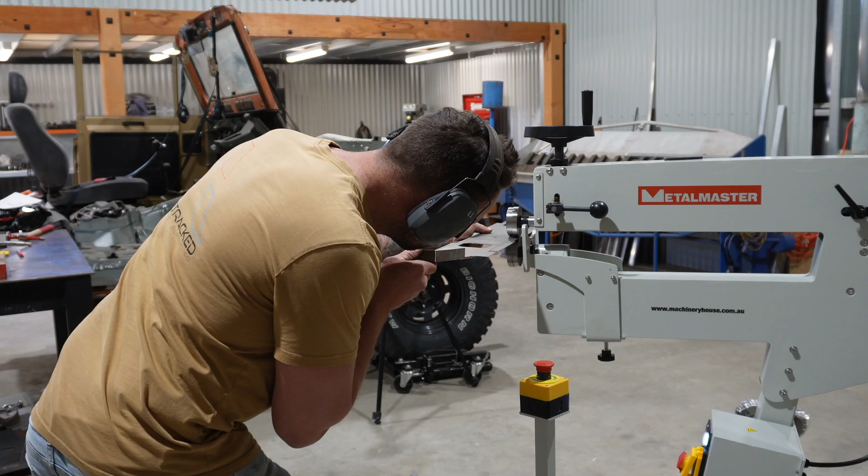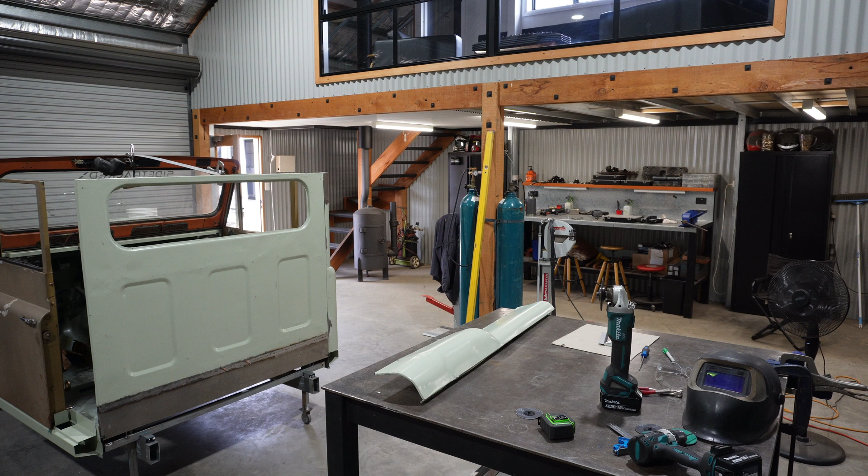Right, back wall's on. Still need to do the contours down the bottom, but I'm gonna try and get a, well, I'm not gonna try, I'm gonna get a quarter on that side. Now, I'll just shuffle this out of the way. You might be able to see there. This needs to be extended down to bottom of sill. Well, that's what I'm chasing anyway.

And then I know that my sill is going to be short by about 20 or 30 mil, which is annoying, but whatever. It's metal, you can join it. I couldn't foresee that when I was doing the sills. If I was an intelligent man, I would have made them 400 longer and then you'd have no trouble, but whatever. It was 1200 sheet, made sense.

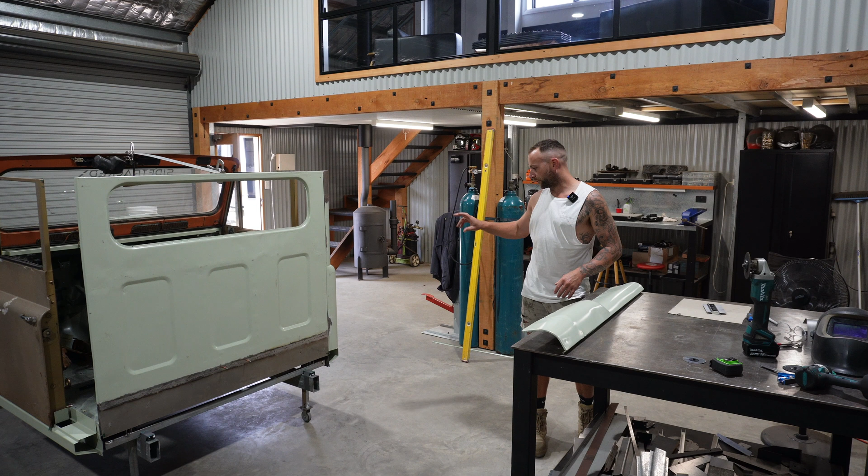Actually, having said that, I do have the first variant of the, I made up one sill, so I should be able to section that out and just add a bit on. I think that's the same profile. Anyway, so I'm going to replace the majority of this. That's my aim anyway. And obviously whatever needs to be longer,

I need minimum 100 mil, so I need to add 100 or so there. Well, let's just say 150 for a bit of wastage, and an extra 150. So I might make a piece at like 300. That way, I should have enough for both sides when I dock it off.

So, first of all, I'm gonna just use my profile gauge to get the profile. Now, both of these have been buckled. Well, this one's not too bad now. I've had a bit of a tinker with it, but this one's all bent out of shape. So I'm gonna get my profile from the most rigid part of this whole panel, which is in here.

So obviously I'm gonna come up into where the radius finishes, but I don't want to move too far down because the further it goes down, the further it flares out and becomes buckled. So somewhere about there is where I reckon I want it. So that's a basic radius there. I'm going to transfer that to some cardboard. Where was that? So that point.

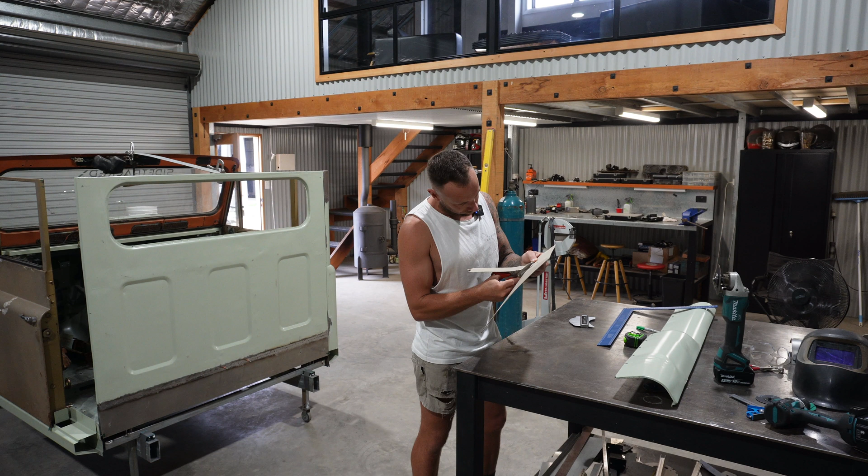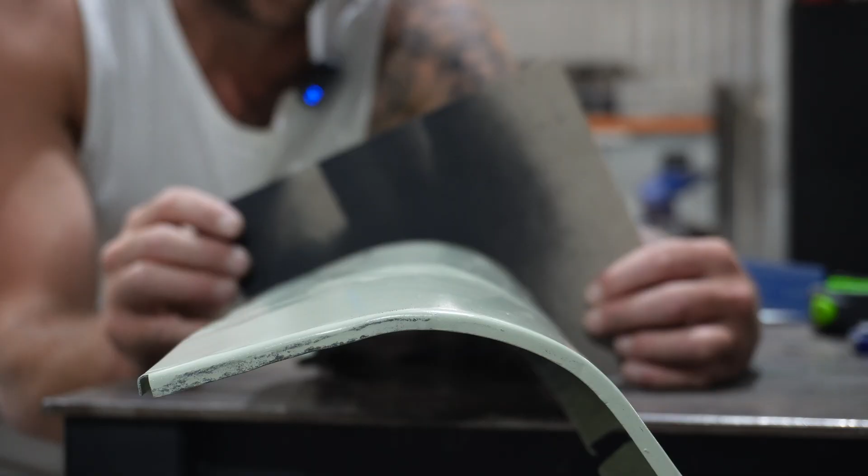Now I really would like a sheet metal roller for this job, but not super sure I actually need it for a lot, so it's not bad. There is not too bad of a template. So if we put that there, it's horrible. So that's what I mean by it fanning out. We want that consistent for obvious reasons. I'm a bit intrigued to see what... it's actually pretty good from side to side, so that's good news.

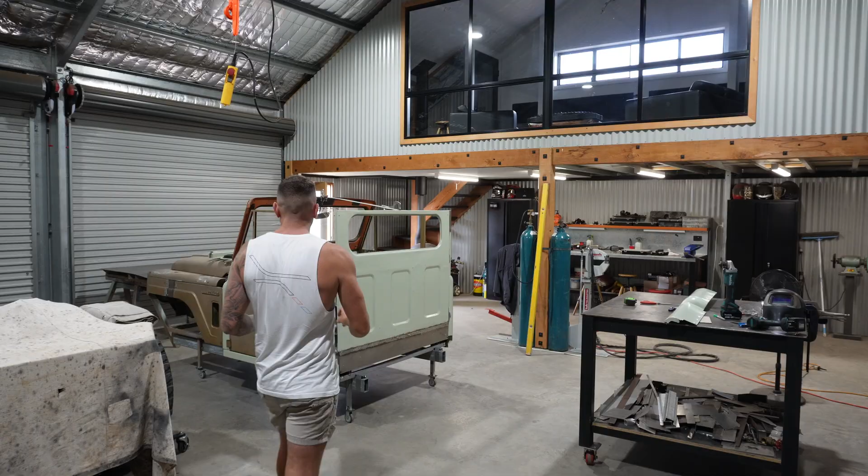So that's our radius. I've just marked on it back wall and door, just so I know which end is which. It is kind of obvious anyway, but never be too careful. Well, I just pulled myself up there. I was almost about to cut that piece off and remembered that we are more than likely going to be stretching these quarters by 50 mil. So I need to take that into consideration with this.

Now, obvious or not, I'm going to make that 50 mil extension down the flattest, straightest part of the panel, down there. So I'm going to incorporate that extra length into this bottom section straight away. I think that's the best way of doing it. I'm not sure if that will cause more distortion than running a 50 mil strip right the way along after the fact, but it makes sense to me to do it like this.

So yeah, I just need to make sure instead of, I said 300, I'll put 350 or 360 or something like that in there. That way we've got some more length. We can always use some more length.

All right guys, I'm a little bit lost on where I was, but I think this is a couple days later from the last clip.

But I think we were working on this other quarter panel. Now, I think I was marking up to replace the radius section. Bear with me for 1 second.

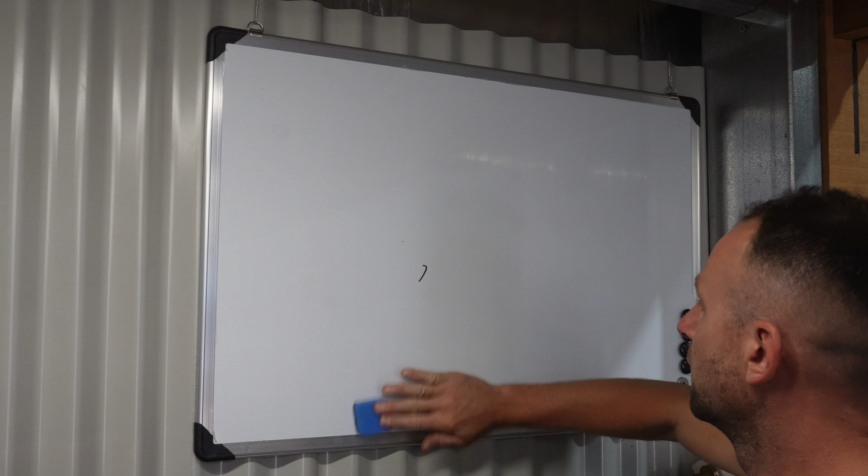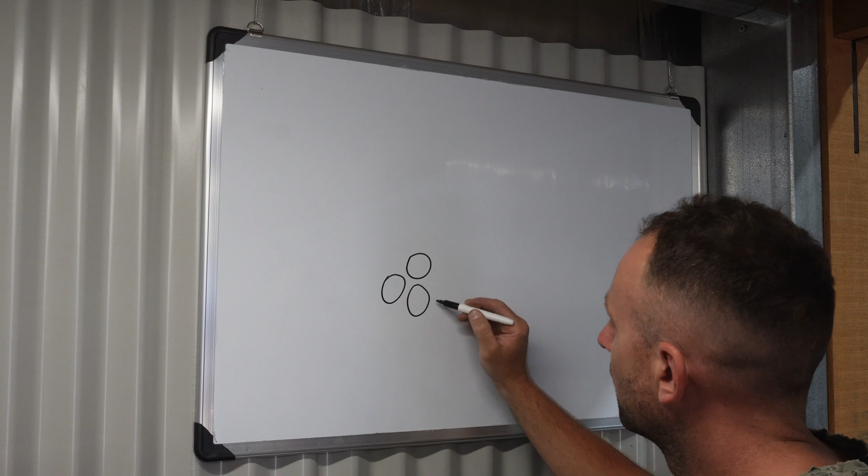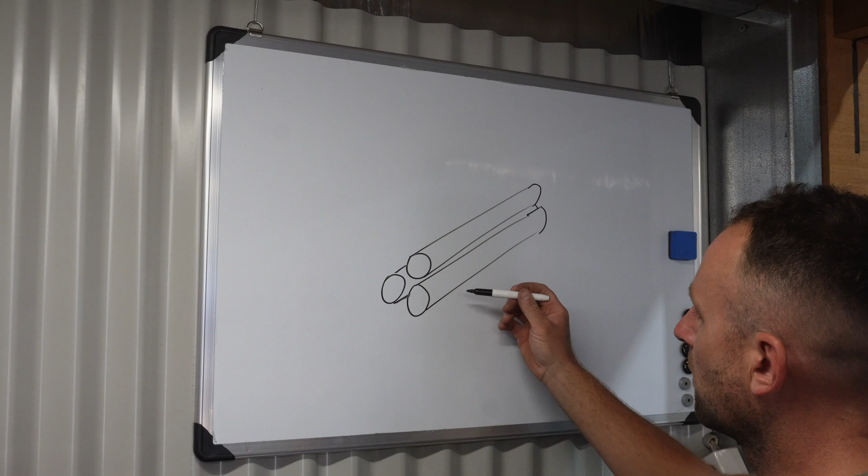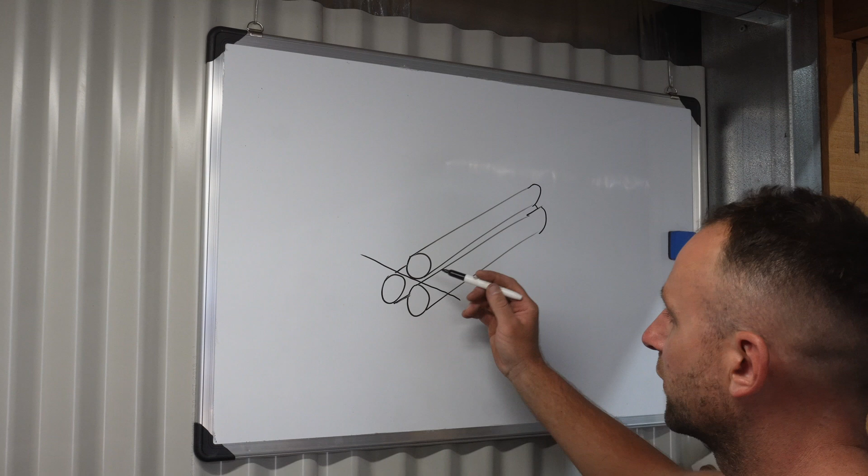A slip roller consists of 3 rollers, somewhat like that. There's one in there somewhere. So your sheet will go between here and here. So you'll put it in basically there. And then, well, there's a few different ways. Basically, one of the rollers has got like a screw on it and goes down. Some on the top; the one that I used, this one went in like that, and the other 2 were stationary. But effectively, it's the same concept.

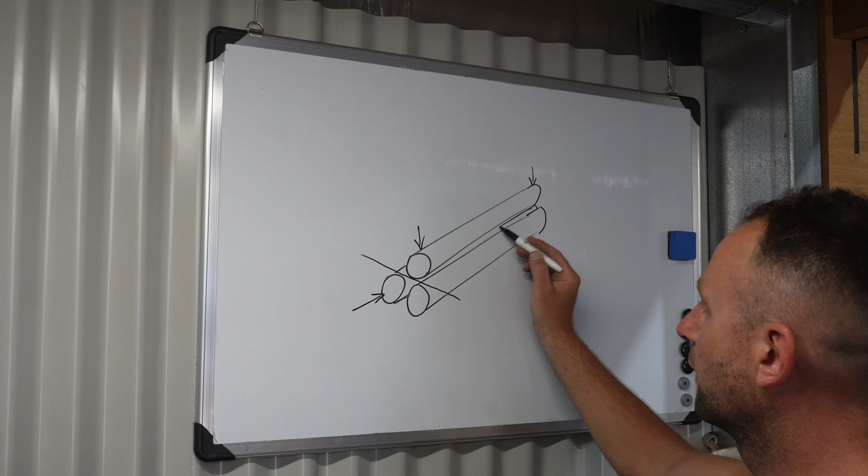The problem with this one that I was using is it's a relatively cheap one. You can spend thousands of dollars on a slip roller. This is a 3-in-1 machine. Still very, very handy to have in the shed. But what we think was happening was, with the tension, this roller didn't have enough strength in it, and it was getting a slight bow upwards, which in turn gives you a different radius in the middle because there's not the same amount of tension here as there is on the ends. And I'll show you what I mean by that.

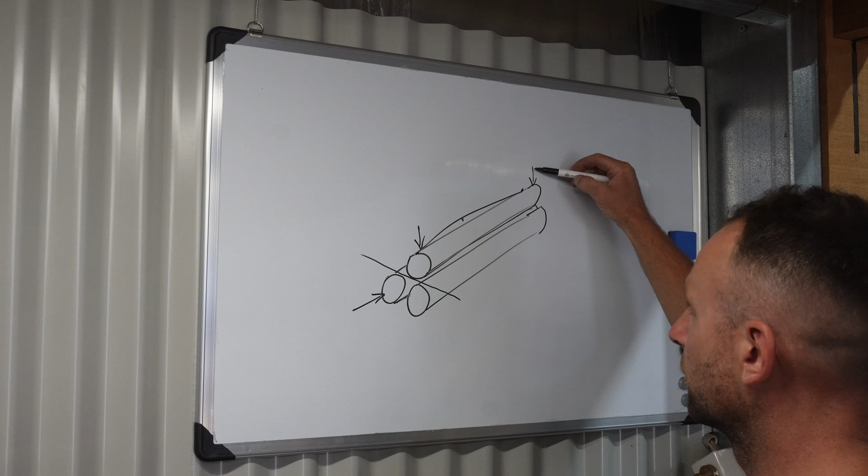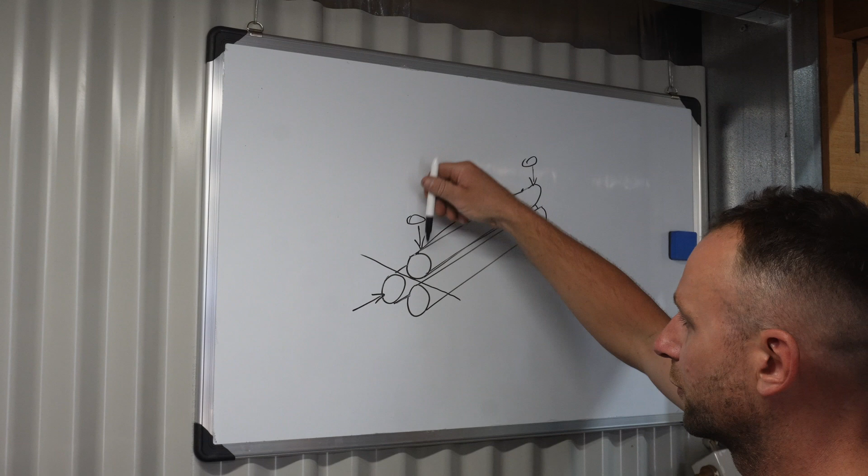But yeah, effectively put your sheet in, and then if you want to get a tighter and tighter radius, you would adjust your handles and screw this down to get a consistent curve. You want to do these literally the same amount. So if you go 1 turn, you go this one 1 turn as well. If you wanted to make a cone, I'm pretty sure you would just operate 1. So it would tighten this radius, but this one would stay wider, which would then form a cone. But I'll show you what I mean by an inconsistent piece of sheet.

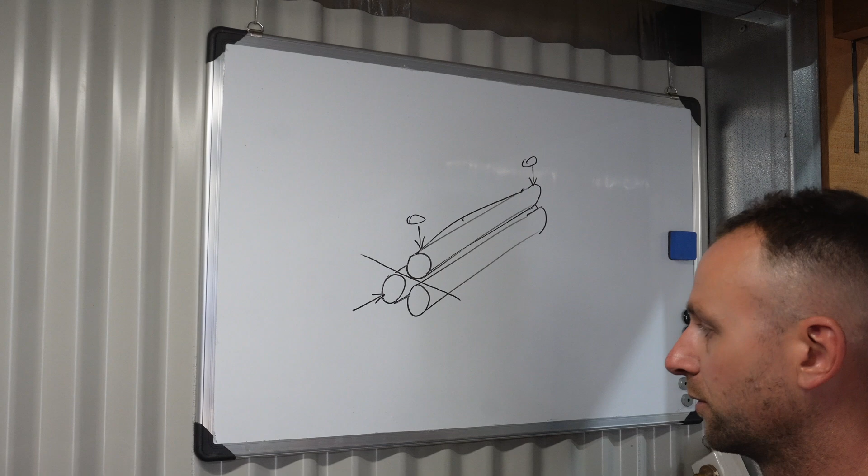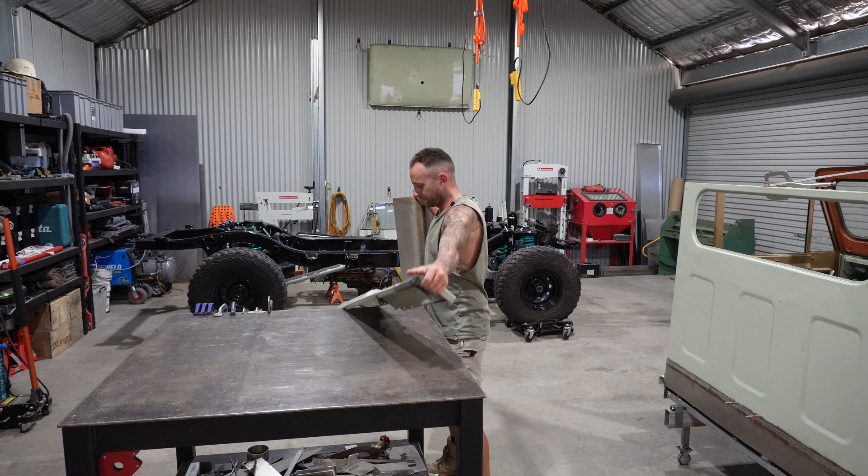So we'll grab both of these. So I made enough to replace that side as well. I don't know if you can see that. If I run it down the lens, you may see that the middle isn't super consistent. Both ends are pretty good as far as to each other, but you can see there's a few deviations. I don't think that'll be an issue because now that it's sort of formed, I think I can manipulate it enough to get it perfect. So I'll grab my template here.

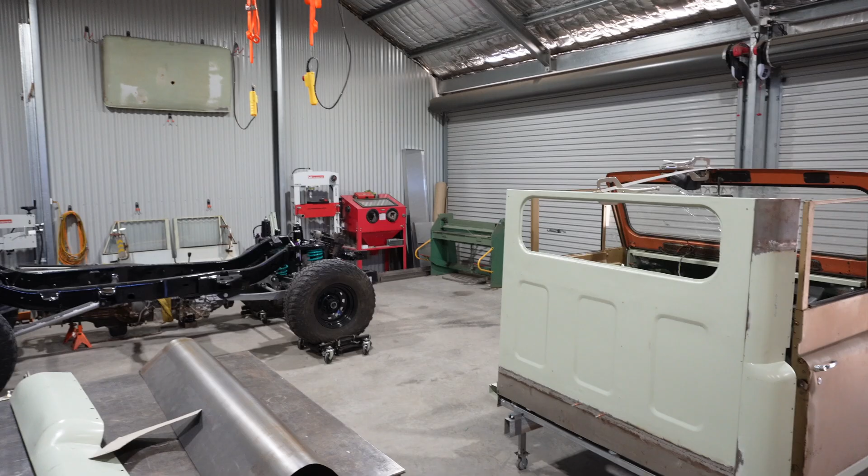Oh, the old shin bone on the shrinker stretcher trick. That's always a good one. Oh, it tickled actually. Anywho.

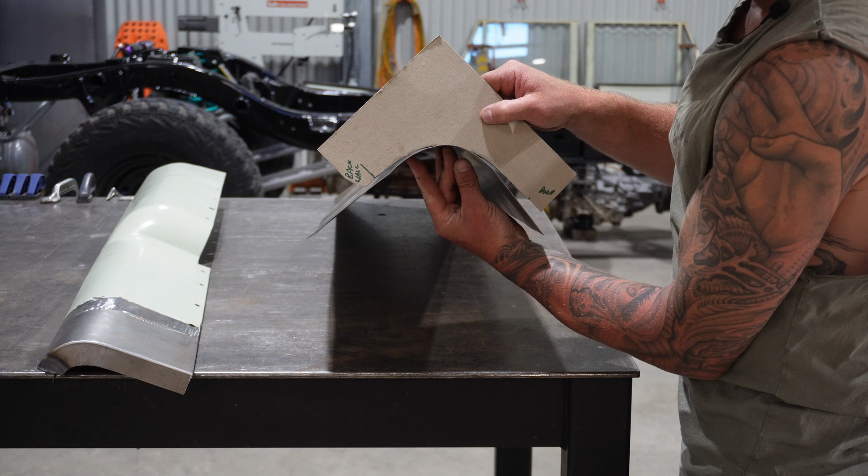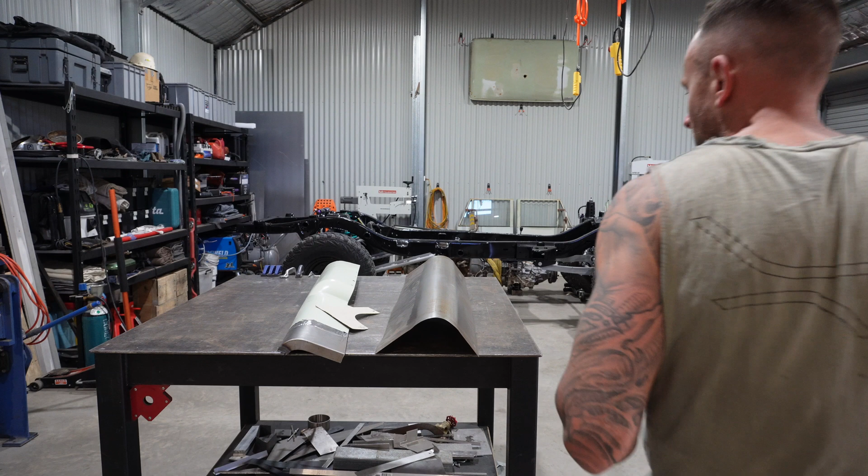So you can see here that it's overformed, which I'm happy about. It's probably easier to spread it a bit than it is to tension it back up. But in the middle, we're looking pretty damn good. Needs to be flared a little bit, but like I said, that there is like Spadunski, happy days. This end, once again, pretty well bang on. So even with a machine that wasn't 100% perfect, because of that issue I was telling you about, I still wouldn't have been able to make it even this consistent without that. So massive thank you to Matt. And it was a bit of a learning curve for me too, pun intended.

So I think what we might do is cut this in half. So we've got enough for both left and right, and then we'll start to manipulate it so it's perfect with this. It'll just be easier with, will it? Yeah, I think it will. Yeah, I think we'll dock it in half and then we'll play around with one. I think I might clamp it in the press and just manipulate it by hand, massage it, if you will.

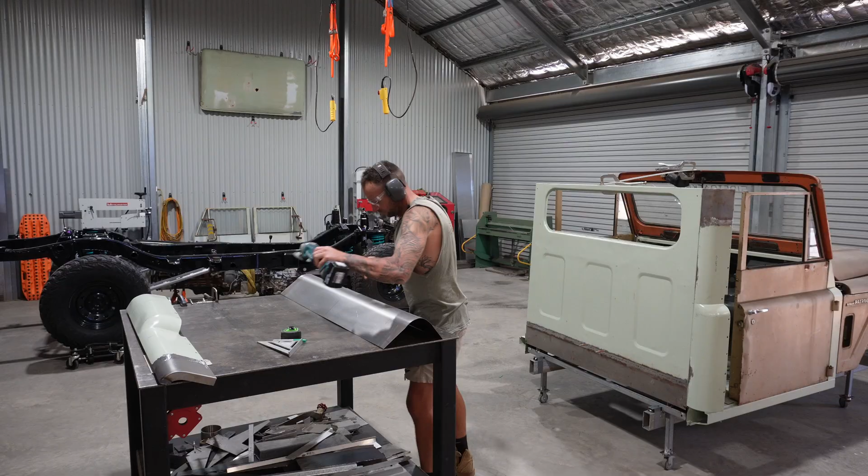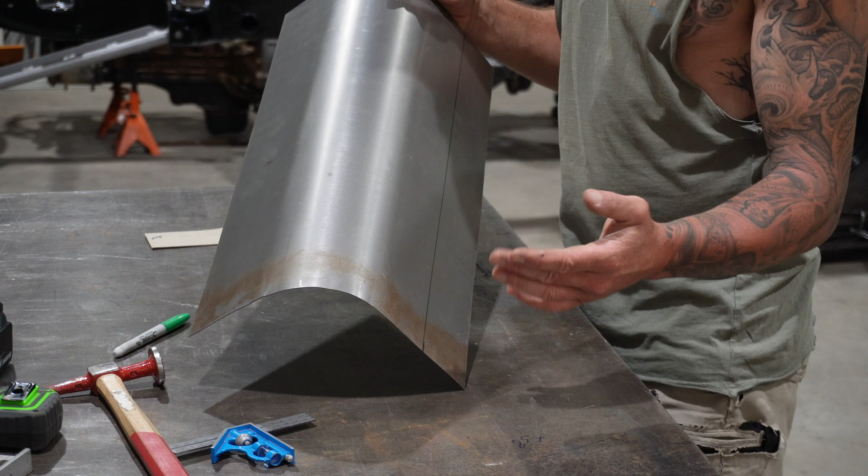Put a consistent line here. So this edge is parallel to this one. When I guillotined it off, it was a perfectly square piece. All I've done now is dock it in half. It doesn't really matter what the ends are doing because they need to be altered anyway. So the important part is that this is parallel to this. So this line here is also parallel to this.

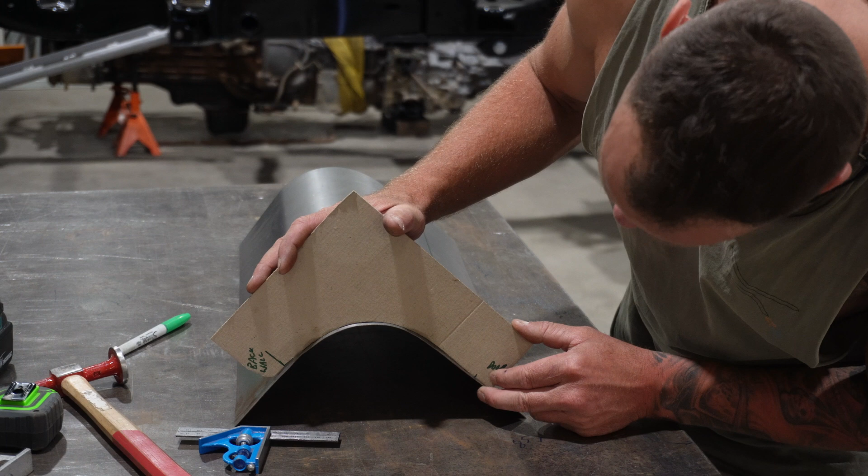The reason I've put that on there is because my template, it doesn't have to be super accurate as far as onto the panel right now, but I'll put a line here where my door edge is, where I'll make that break. So with that line there, I can match that up with that line for my door edge, which is pretty good. I'm pretty happy with that. That's almost perfect. It also looks perfect here.

But you may be able to see that I'm still 15 mil away from being a perfectly parallel rolled piece of panel steel. So when I go to line that mark up, all of a sudden, it's not great at all. And this is what I was talking about, because this was the middle of the 1200 piece, and it wasn't consistent right the way along it.

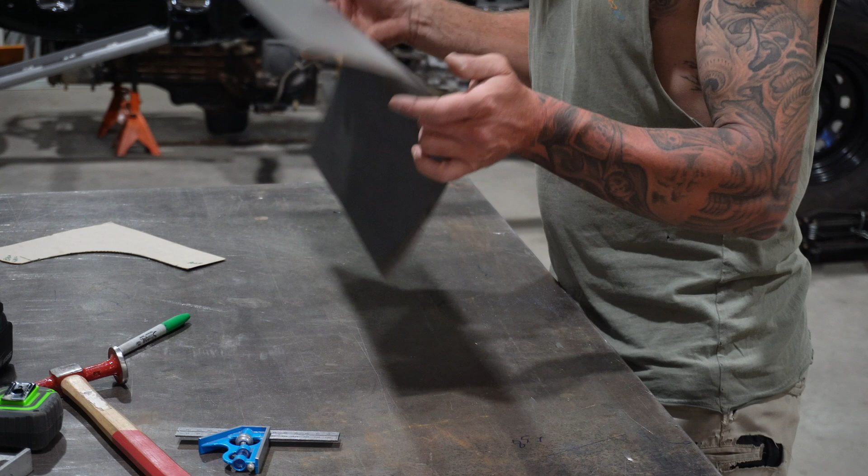That is where it becomes an issue. Looking at that, you'd think, oh sweet, perfect. You run the template up it, it's all sweet. But then you put a line and realise, hang on a second, we're way out. It's not super difficult to fix, but it's got to be fixed. So I've mimicked that line over there. I'm going to put it over here just to act as a clamp in the brake press. The only reason I transferred those lines onto this side is just to keep it parallel.

And now I'll just gently... I could probably cut this down a fraction and still put my gauge on it, I might do that. Now I can still run my gauge through there. So yeah, that's pretty good. Really good actually. So I just need to work on this side. It's a lot easier with that clamped in there. I'm nearly perfect already. Beautiful. All right, that can come out of there.

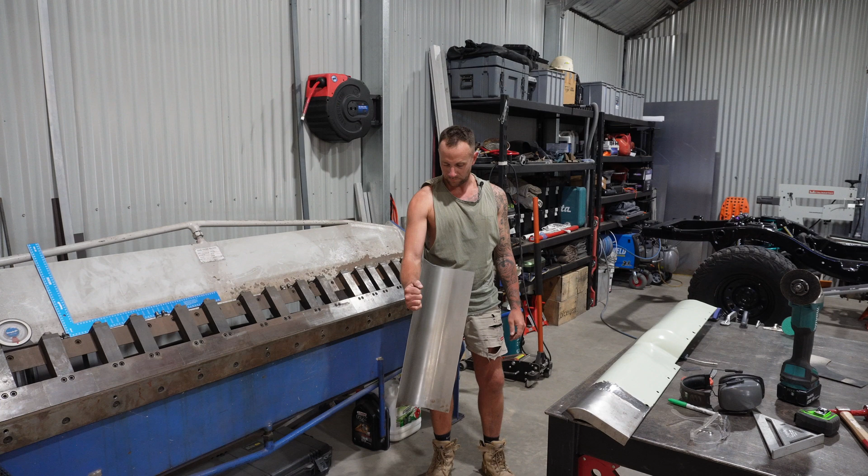Yeah, everything about that looks so much nicer. Without having a slip roller to start with, getting it looking consistent like that took me maybe 10 minutes at the most. So pretty happy. I wonder what it looks like. Well, that's not going to.

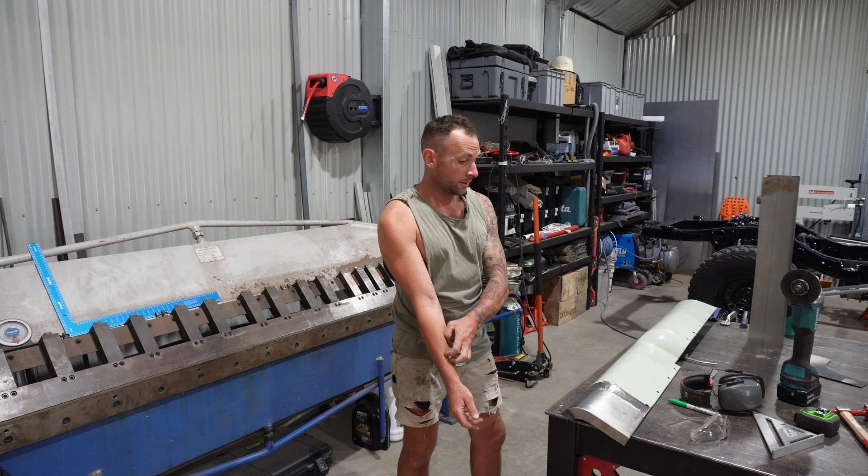All right, now we need to sit it over this panel, work out how much extra we need to hang down to cover the sill, cut it off, get my break points, fold them, and then we can stitch it on. I've also come to a decision over the last day or so: this stupid flange that's given me the shits for the last week on these other bits, I'm gonna cut it off. It serves no purpose to me. I'm talking about this little 5mm return here. It doesn't do anything. There's enough rigidity from this break and the back wall to hold that together.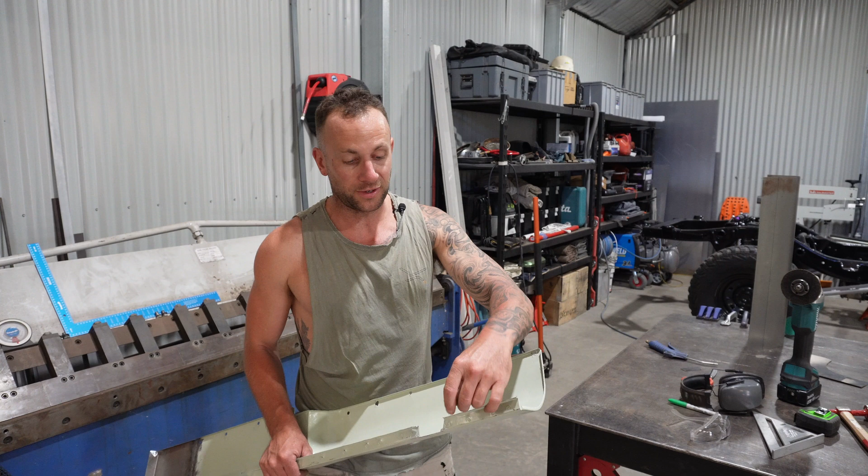Any other seam that we've had in there doesn't have that second break. I don't really know, maybe it's to stop a sharp edge in the cab, but I can't see the real need for it. It's going. That way things will be really nice to deal with. So yeah, we'll lay this over, work out how much we need. I think it was 100mm. Cut it off, stitch it on.